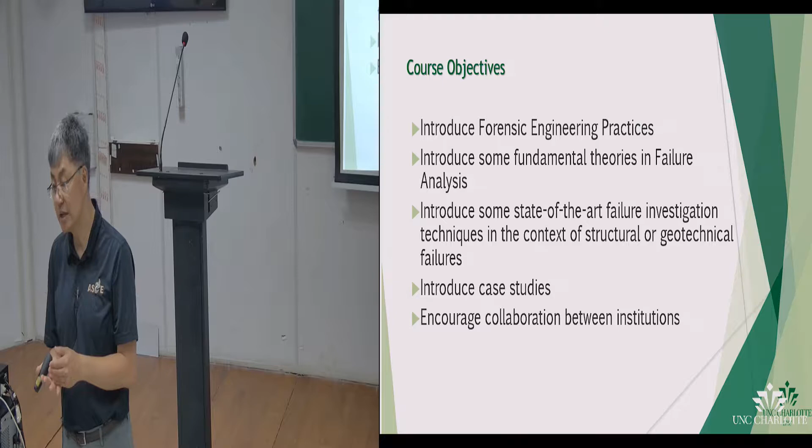Science is a very pessimistic topic. A lot of people learning science think, oh, I'm going to be a great scientist, I wanted to invent something. But by the time you want to invent something, you are no longer a scientist, you are an engineer. So Einstein once made a clear distinction between engineering and science.

Science is the investigation of things that exist. Engineering is the investigation of things that doesn't exist. In other words, when you design a building, the building doesn't exist yet. That's why engineering is very, very different and more challenging than science.

Science is very basic. Science is defined as the elimination of all possibilities. Does anybody think that by studying science I can improve human lives? You're wrong. You are trying to understand how life is, but you are not improving life by any measure. The moment you leap over into trying to improve life, you become an engineer, if that makes sense.

Forensic investigation is very, very core based on scientific investigation. You have to have the capability to look at a problem and start taking out all the unlikely causes. Whatever remains would be the most probable cause. Please pay attention to the way I use my language, because as a forensic expert, you have to stand in court.

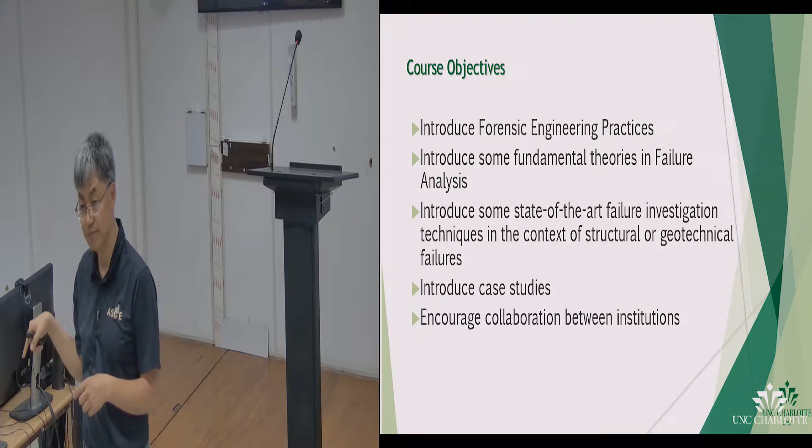They are building a dam, and they have to blast part of the mountain to create more space for the dam, and they are using the rock that was blasted to build the dam. As a result, the blasting caused a lot of homes to be damaged. So I'm defending for the homes, and the lawyers will ask me very critical questions.

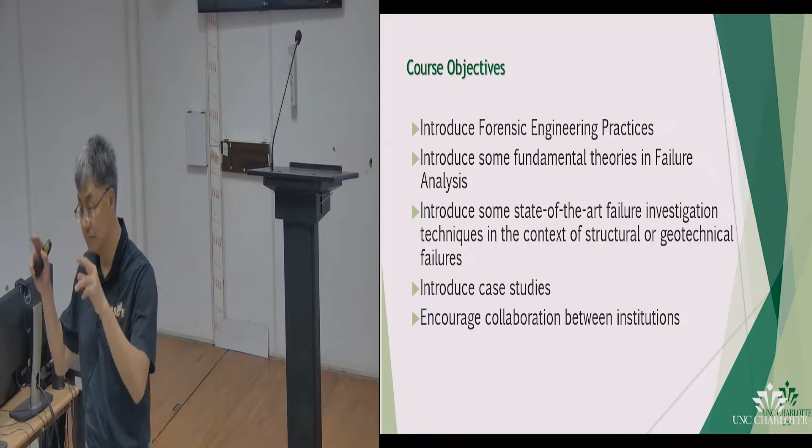I don't know how many of you have knowledge about blasting in mining. It is a very narrow area, and there's only one person, his name is Dowding, that has published a book and field reports on blasting effects on buildings.

I am a much younger gentleman than Dowding. He's probably in his 80s now, and he's no longer active, he's retired. So when I present my work, they will question me from his book, like, on which book did you find that Dowding actually says this is the reason for this kind of problem?

Did you prove that the house has cracked more than 0.3 millimeters? They ask those questions, and I have to tell them, well, no, I cannot prove that, because by the time the plaintiff comes to me - plaintiff are the people that sue, the other side is the defendant -

the case is already closed for 2 years. In other words, they stopped blasting for 2 years. So whatever crack I found on those homes, I have to use some other means to prove that it has a relation to the blasting, and I have to do it scientifically.

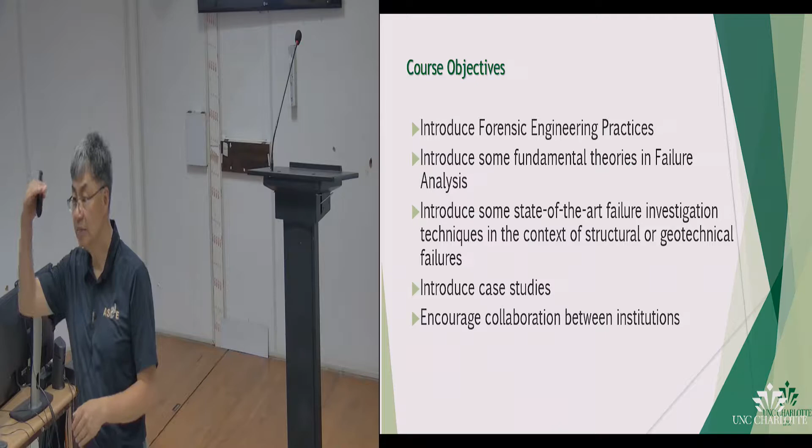I have to explain to them, yes, if you invite Dowding to defend against me, he has more seniority, I have less. But our scientific investigation approach should be the same, and our conclusions may not be the same, and then you have to present to them why. Throughout this two-week lecture, I will describe this case study and show you some of the methods that I use in practice. This gives you a sense of the challenge here.

We will also introduce, like I was pointing out, the LiDAR technique. I started doing LiDAR investigations since 2007. LiDAR was not very popular at that time - nobody used it. But now, at least in the U.S., LiDAR is used every day. When they have a new home built, people will use laser scan, which keeps an electronic document of your building.

So now, if you have a problem with your home, you can use LiDAR scan again and compare the before and after image of your home, and find out how much was the damage. Those are coming technologies that I believe within 10 years will be practiced in India, because Indians are very smart. Whatever is invented, within 10 years you catch up and do the same thing. So many of you, in your immediate career, will be seeing LiDAR scans.

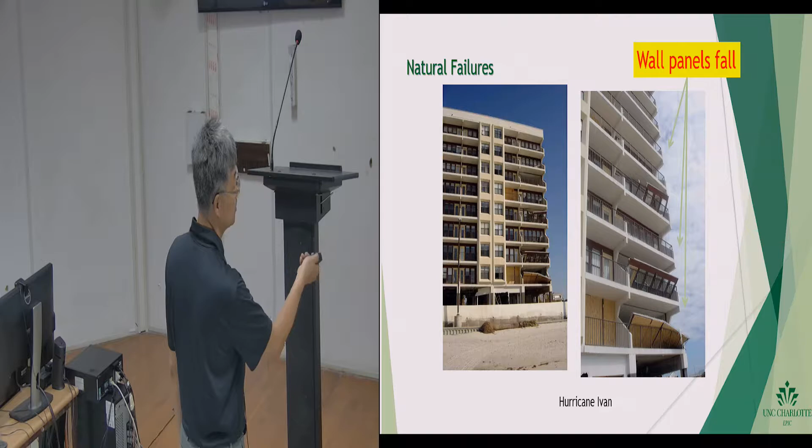So let's talk about failure. There are many aspects of failures—it can be a building that was designed poorly, or it can be something that had a natural disaster. This is Hurricane Ivan, and we did an investigation of this entire building, and you can see it has many kinds of problems. You can see all these wall panels fall off. Even this is the original panel—no, it's still the original, but they protected it.

In fact, this is a good time to mention that one of the lectures I'll be discussing is disasters that are beyond typical engineering design. Since this is a practice, I'll talk a little bit about the industry. Disaster industry is a $1 trillion business a year in the world, so forensic engineering is actually a profession that is blowing up. Many people are involved now because of failures, and many of these failures are going beyond engineering design. I'll describe a little bit about those based on my own expertise. In fact, some of our students here did the investigation together with me, so I'll talk about that as well.

You can see failures of these lintels, and the sand on the bottom. In the U.S., your client is most likely one of two kinds of people whenever you have this kind of issue. One is the plaintiff, usually the insurance company. Every house in the U.S. is insured in some way, so once your house has a problem, the first thing you do is call the insurance company, and they will send somebody like myself to do the investigation.

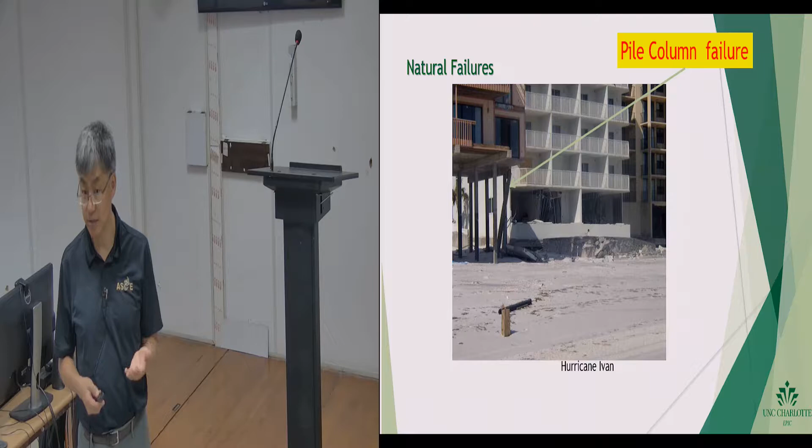As an investigator, it becomes very important for you to see details. You have to be able to quantify very, very narrowly. One of the arguments in this case is that there was a big car here, and the wave pushed the car and the car hits the column, and that's what caused the failure. Is that true? How can we prove that is the case? So those are the things that forensic engineers do.

Many times the argument will come here into this case is whether your building foundation liquefied. The reason is because in many countries, earthquake design and liquefaction of the soil are two separate issues. So this kind of incident becomes a very long battle for the engineers.

You have to prove a lot of things. You do a lot of drilling, you get the soils out, and then you have to do a lot of triaxial tests to prove whether the soil has either liquefied or not liquefied. You have to do a lot of dynamic analysis as well to prove that the shaking force was strong enough to cause the building to collapse. So a lot of those investigations have to be done.

After Trichy, I'm going to China, and I'll be taking 8 of my students from the U.S. to investigate the 2008 Sichuan earthquake in China. This is one of the significant earthquakes in 2008, and 80,000 people died, many of them buried alive. Our students are going there to collect the historical data from that time and then try to do some resilience assessment.

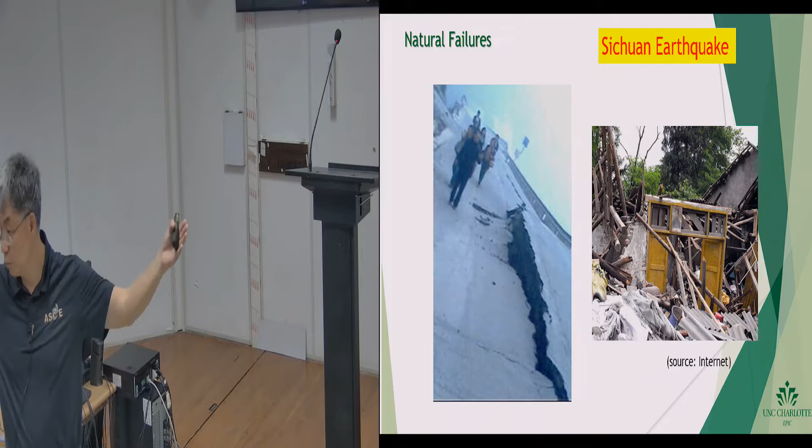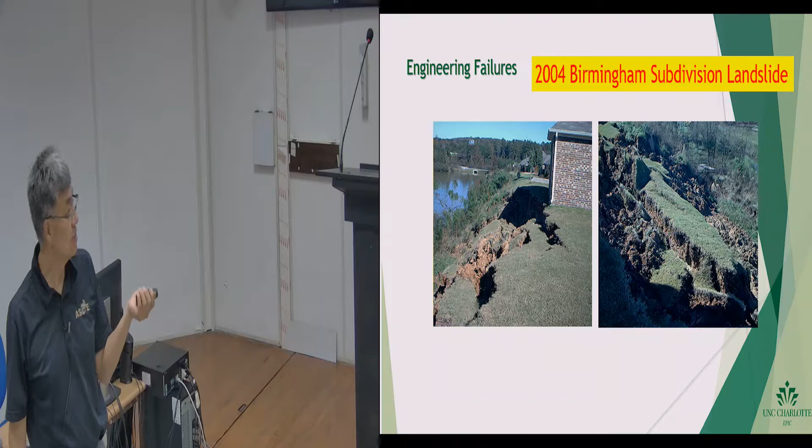This is one of the investigations I did early in my career, and it's a very unique case. At that time I lived in a city called Birmingham, Alabama, in the U.S. The temperature there is very much like here, it's the deep south of America, so the weather is very warm. What's happening is the city is growing, many people have moved in, new homes are being built, and it has a lot of hills.

Compared to Trichy, which is very flat, Birmingham has a lot of small hills, more like Madurai. The problem with Birmingham is when people start building a lot of homes.

It actually changed the groundwater level. When you have poor compaction of a home, suddenly the groundwater drops, then you start having soil collapse. We see a lot of those homes having slope failures or soil collapse compounded failures.

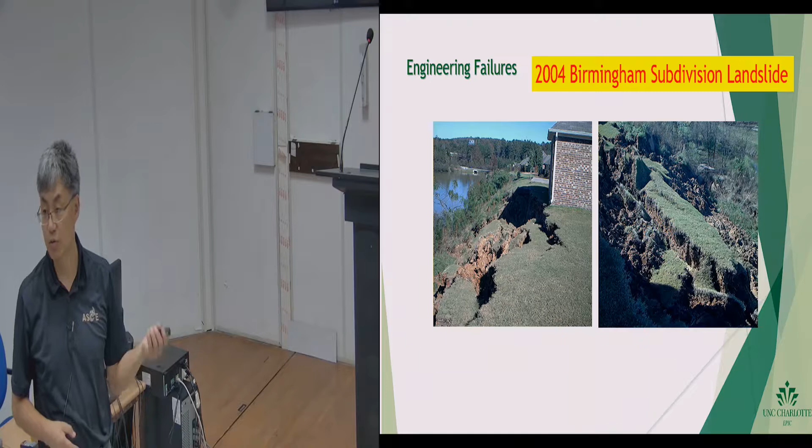We have to go do investigation. At that time we see multiple homes, and we start realizing the problem is much bigger than just poor compaction of the ground. The groundwater was actually fluctuated because of draining. People building new homes drained the groundwater and changed the water path, resulting in multiple home failures.

Some of my investigations relate to coal mining. In coal mine countries, you see a lot of homes collapse suddenly, even though the mines are closed. In Tamil Nadu I don't think we have too many coal mines - there's one between here and Chennai, but not a significant area. In the U.S. we have a lot of coal mines.

The only way you can prove this is subsidence - you may not be able to see it, but this piece of land suddenly dropped, so you have a very straight edge. That tells you this was not natural; it doesn't happen naturally.

So what we do is take the old mine maps - these maps were made in the 1960s, even before I was born, so there's no GPS data. We have to take this map and use Google Earth and similar tools to make sure this area is indeed on top of this home.

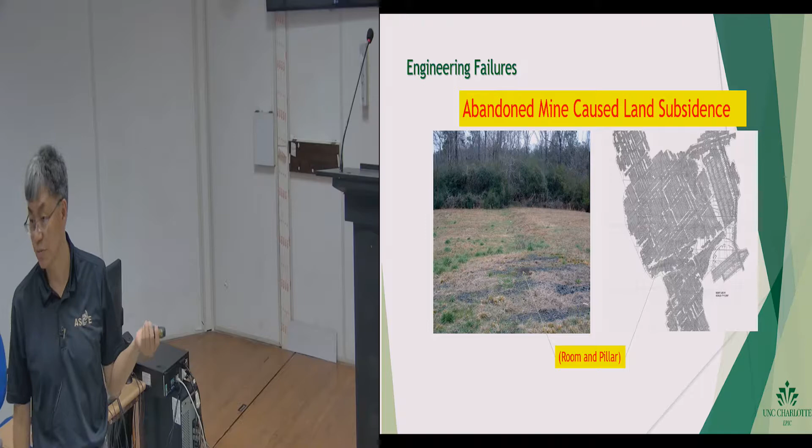We learn something in the forensic language: even though you don't have the means to physically prove this subsidence has something to do with the coal mine, because the mine is 1,000 feet, 300 meters deep, you can't prove it's directly related. But because this home was on top of the coal mine, based on the case law, you can judge the coal mining company responsible. This is what we call a class action lawsuit.

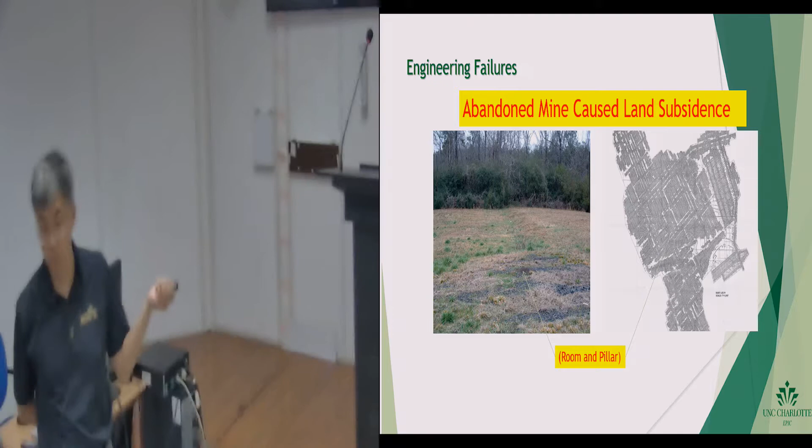Many of those cases have been investigated in the past, and those are big money. The mining company lawyers fight very fiercely against any lawsuit, because if you can prove one home is damaged by the coal mine, there are hundreds of homes. Suddenly they have to pay a million dollars - that becomes huge money.

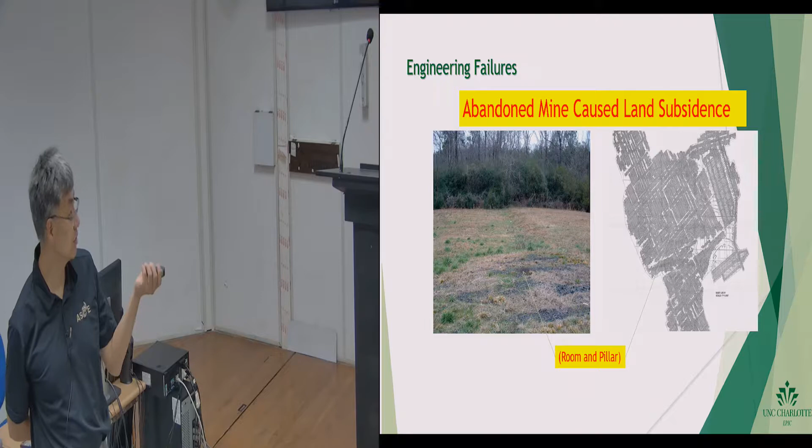This is a critical kind of case, and often your investigation finds the failure is more related to construction. This is a case where they were building a caisson - when they were digging and doing rock blasting, suddenly groundwater rushed in and everything collapsed. Now they stopped work and want to investigate who is at fault.

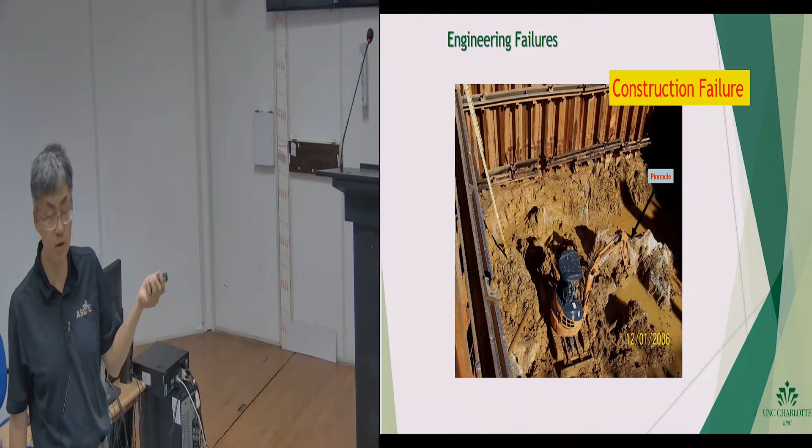You can see this bulldozer was literally stuck in the mud - they can't take it out anymore. So who is at fault? You're being invited to do investigation, so you have to go in there and look at the problem, and any technique you can use to prove one way or the other becomes useful. This is what forensics people do.

This is the same picture, and here you can see the sheet piles being driven into the rock. Notice that something came out from behind - the question is, what is this material? This specific lawsuit was actually the construction company against the blasting company.

Okay, so the construction company claimed the blast company did a very poor job in blasting this area, and as a result, some of the rocks became incompetent, became weak, and so when they drive, the rocks fall apart. But from this picture, you can see that this is something from behind the rock. Okay, so our conclusion is this is more geology than blasting.

Okay, so what happened in this part of the United States? We have a lot of what we call the pinnacles. In other words, in this area, if you take out all the soil, the rocks are like little mushrooms on the ground. Okay, and so when they do blasting, they blast out the rocks.

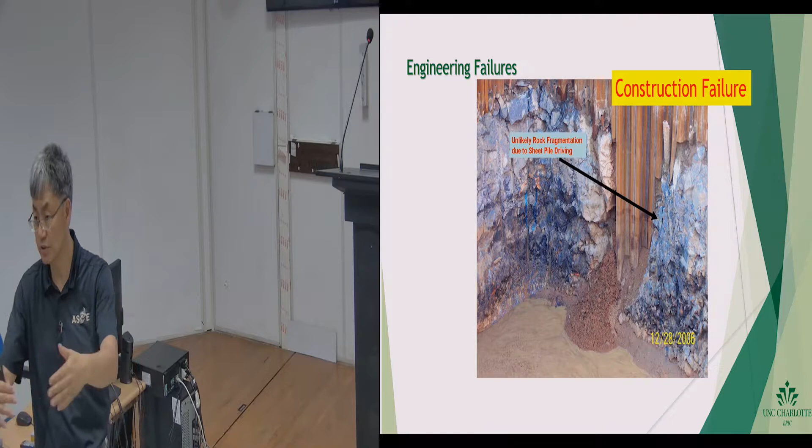Okay, and the groundwater in this case happens naturally because this project is right next to a river. So we know that they have very, very soft soil. But the piles are supposed to be able to protect the area from any groundwater seeping. Okay, so these are the cases.

And we will be talking about some famous cases like the 1981 Hyatt Regency walkway collapse. If you look at this picture, there is actually another walkway right here, similar to this one. This is one of those very famous case studies because in 1981, American law does not qualify engineers as liable for this kind of problem. But this fell because of design failure. In fact, when I present this case, we'll have more discussion on what exactly happened there.

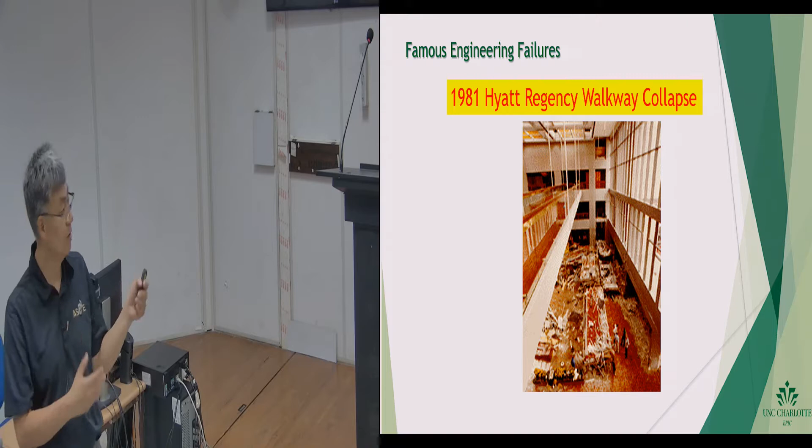And there's the 2007 I-35 bridge collapse. This bridge fell in what we call the perfect storm, and this bridge collapse becomes a strong litigation. Why? Because many people claim that the bridge was having major issues. But the fact is, when the bridge collapsed, they were actually repairing the bridge.

Okay, and so what happened in this case is the State Department of Transportation had already claimed that they did the inspection. They know the bridge is not safe. They had contracted a construction group going out there, and it was the perfect storm because this is a major highway bridge, and it happened at noon when people are going to lunch.

And because they blocked off half of the bridge, only half had traffic, and cars were parked completely on top of the bridge. And on this side of the bridge, they had many bags of concrete and steel beams all stored on top of the bridge. So you have the maximum loading on the bridge, static loading.

And then suddenly, since it's a truss bridge, some of the connections fell, and then the bridge collapsed. So that's what we call the perfect storm scenario.

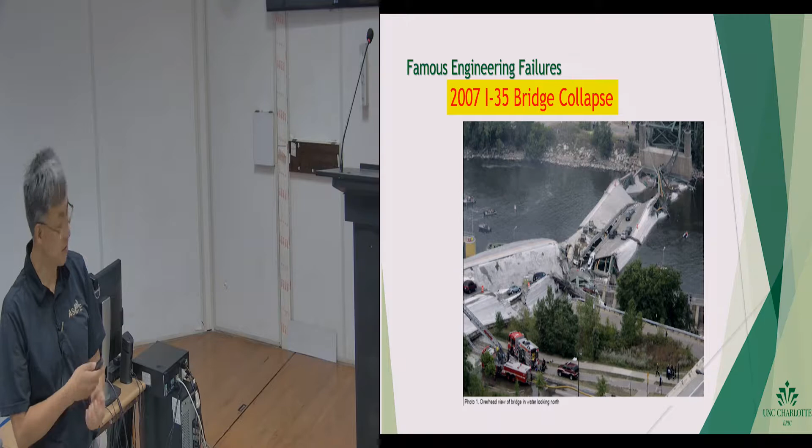And after that, for every major incident like those two, I will explain to you the implications to engineering practice. So after these two incidents, there's a lot of debate in the engineering profession about how we can do our job in a safer manner.

So forensic engineering is not just about doing a case, it's actually a practice, and we encourage it. In fact, this is one of the early missions that CN and I have when we start to collaborate: how can we promote forensic engineering practice in India? So that many people like you can put their minds together and we can enforce the practice, and hopefully we can be a much safer profession.

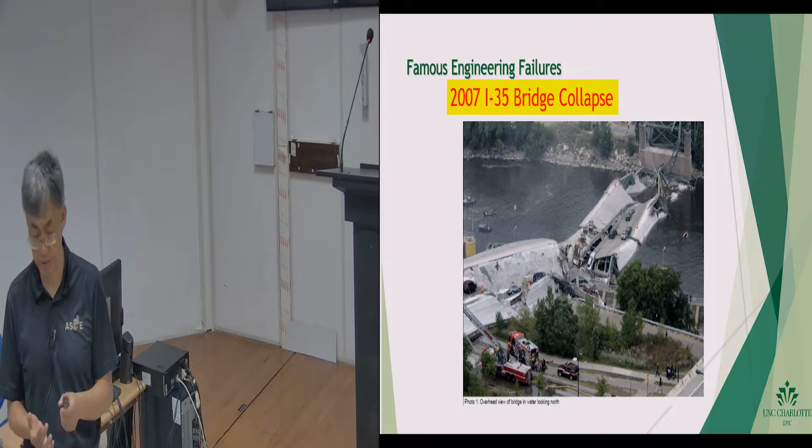And then there are some that are man-made. So this is the 2001 World Trade Center attack. The building fell. We don't know if it was actually the way that the terrorists designed for, but the buildings collapsed. In fact, this building collapse becomes very significant as far as technology for forensic investigation, because many people who saw what happened died. So there is no data for us to be able to investigate what actually happened.

Each of this building is a $1.5 billion lawsuit. So the insurance company for those two buildings and the owner are still fighting even today. And we hire some of the best forensic companies in the U.S. to develop some really advanced techniques.

So what they have done is they were able to take people's cell phone images, the video they take, and then use a computer algorithm to demonstrate what happened when the airplane hit the building. Even so, even with all this advanced technology, I still receive newsletters from a group of architects.

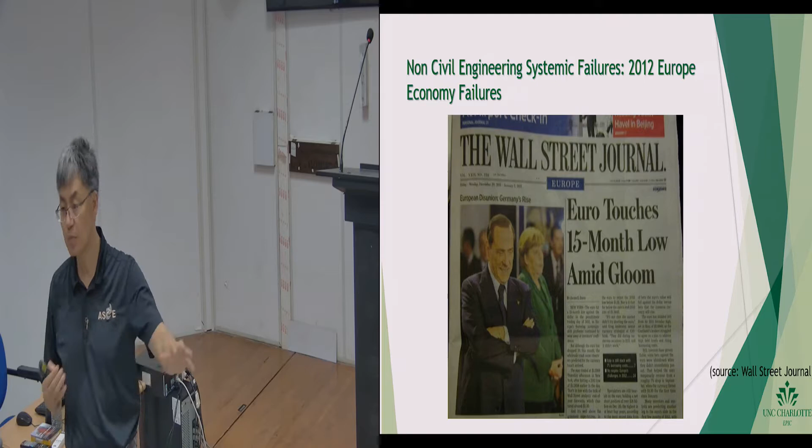And so you quickly realize that when you cross national boundaries like the EU organization, it becomes difficult to manage business. And that is why it should not be a surprise that today we have such an issue of Brexit. Even at that time, the British people had already voiced that they want to separate from the rest of the European countries. So you quickly realize that at the system level, failures go beyond your traditional civil engineering training.

And the analysis of failures from a failure analysis standpoint is very complicated. But most of the time, you go through a chain of reaction analysis, so you have to use a time-dependent process to look at how failures happen. If we are all educated in this kind of analysis, it will help us tremendously as civil engineers.

Because in every civil engineering project, there are windows of failures, or windows where you can see a failure. Because by the time you start talking about wanting a project - for example, build a bridge from here to Tanzhou - the project may start in 2000.

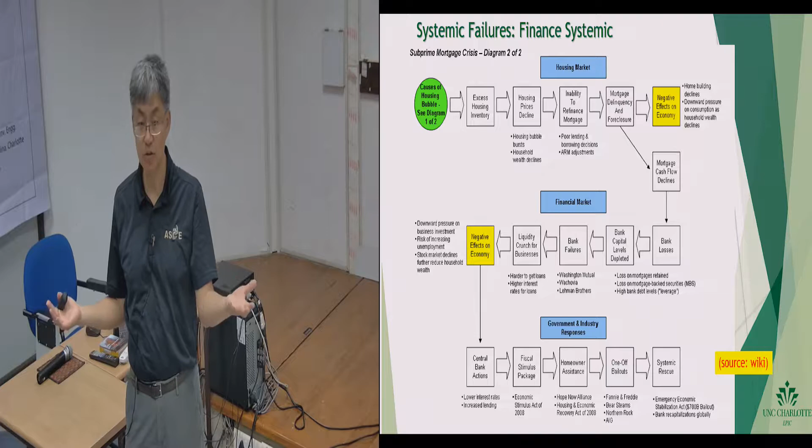By the time you do the preliminary design, the consulting company - the local government has to raise the money, right? So they go ask for money or whatever they do, and then once the money comes, they're probably already 1 or 2 years behind. 2 years behind means many of your investigations, the geotech, the initial design, may already be invalid.

And then once the government has the money, they ask you to redo the design. Many things change - the local people start fighting, politics get involved - it will be another 2 years before you finally start designing and building your bridge. So within that 6-year span, many things could have happened wrong, or could cause something to go wrong later.

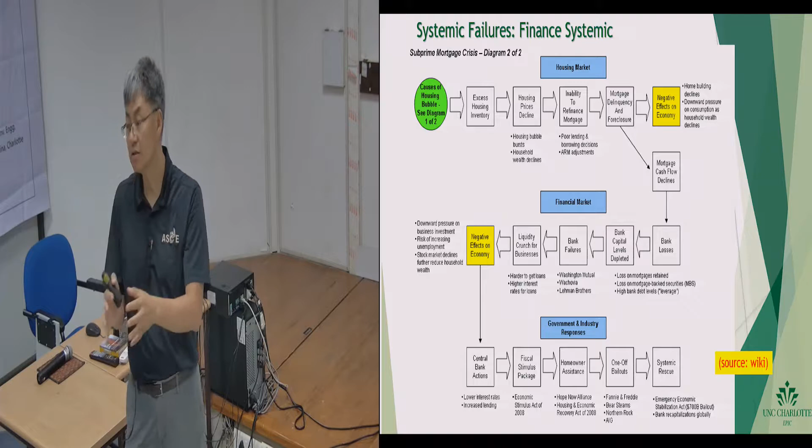So we'll be looking at some failure cases. And there is another kind of system failure, and that is from our own engineering problem.

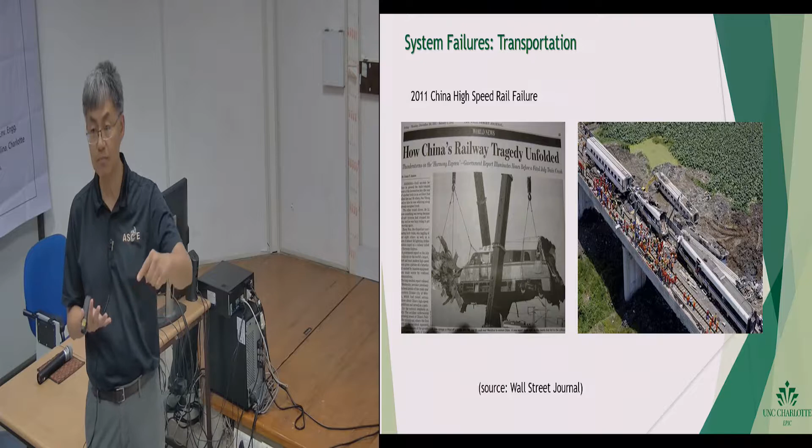This is 2011, one of the high-speed trains in China that failed. This is the route from Shanghai to Beijing, the two largest cities in China. At that time, from Shanghai to Beijing by train, it takes 7 hours, running at 300 kilometers per hour. So they wanted to reduce the time, so they designed the train to run at 380 kilometers per hour - that would cut down the time to 4 hours. Well, the first time the train flew at that speed, it had a major accident, and many people died.

So the Chinese government is not the smartest government, no matter how much they think about themselves. So what did they do? They limit it - from now on, no train will go beyond 350.

Instead of solving what went wrong with this problem, they used government law to limit the high-speed train. The reason why they don't go into the technology is because this is not Chinese technology—every high-speed train built in China is German technology. The Germans built the first line for the Chinese, and after that the Chinese just replicated it on their own, so some of the embedded technologies they don't understand, even today. Instead of admitting they copied other people's technology, they just hide the problem.

So the transportation minister was put in jail—I think he was shot. They claimed he had some kind of corruption, and then he was killed. But then they just limited the highest speed the train can ever achieve, found somebody to blame, and forgot about the technology. That is not the way engineering should be practiced.

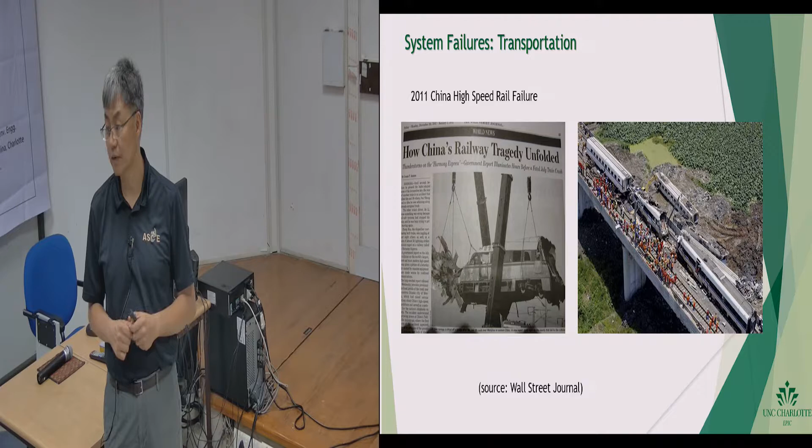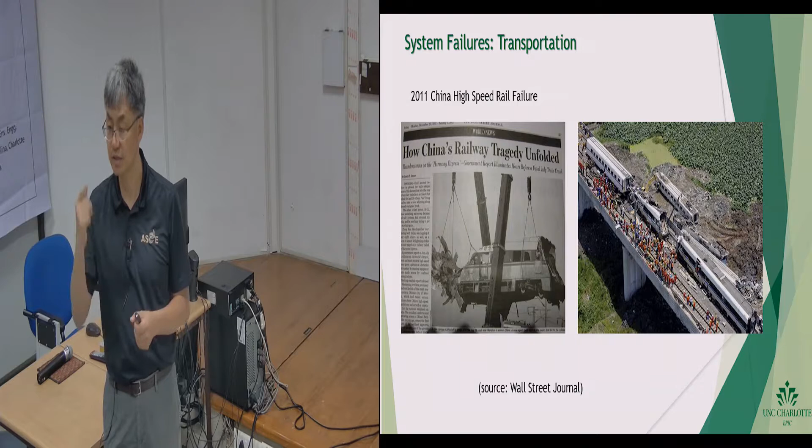We need to dig to the roots of the problem and understand how it is designed—that should be the way of engineering. So even though sometimes politics is involved, we as engineers, I hope, have the guts to at least stand up and say, I want to learn everything that is inside.

What I just described is nothing new. We have a famous professor in my state—he's not from my institution, his name is Henry Petroski. Please write his name down. He wrote several books about engineering failures; he's famous for the study of engineering failures.

He famously claimed that every 30 years there will be one famous bridge collapse. He's pointing the finger at all of us, in the sense that there is a common, very pervasive habit—it's not just the Chinese. Every one of us has the habit of copying somebody else's design, and if you don't fully understand the design, you just copy.

Eventually it's like taking an image and recopying it on the computer—the resolution disappears, it becomes a very poor quality image. Why? Because every time you copy somebody else's work, if it's not the original, you lose a lot of the fundamental theories. As a result, one of us will screw up and build a bridge that will collapse. In his book he mentions many case studies.

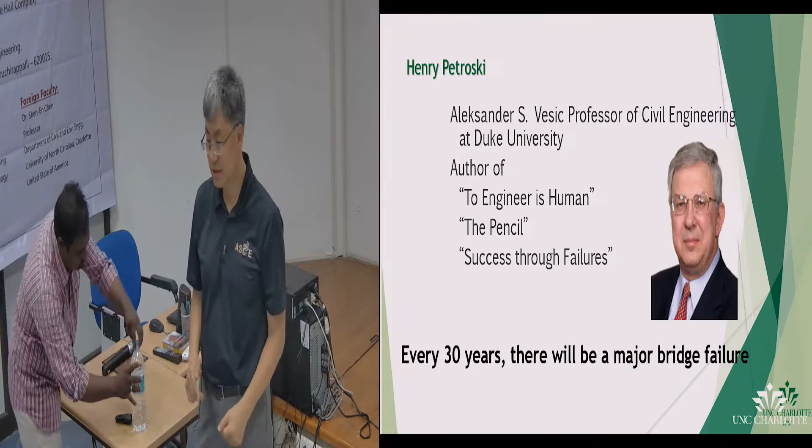One of our projects for our BTech students, the last year's BTech students every year, is to design how we can mine from meteorites, asteroids. The world will be very different as we evolve, and especially some of you BTech, when you graduate, you'll be doing something very different.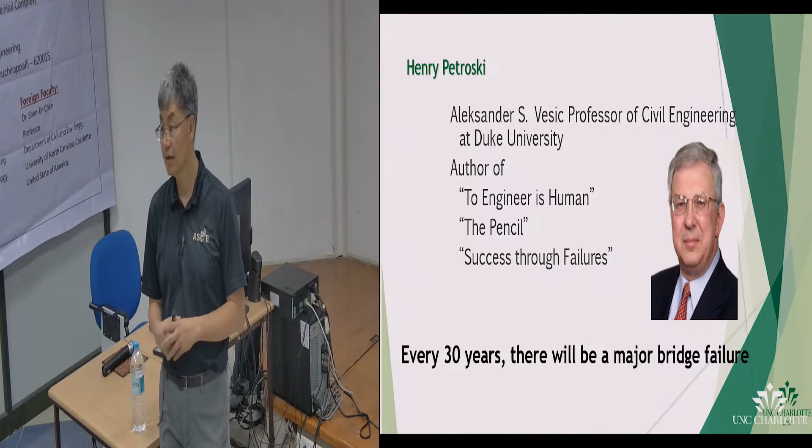Automation is coming, so there is a big call for robotized construction management, construction process. 3D printing of concrete structures is coming. Steel structures has already been done. So there are so many things that are changing the fundamental practice of our profession.

So like what Petroski was saying, because of all these new technologies, failure will happen. And so learn from failures—it's the most important lesson for all engineers. And that's why we are here to promote forensic engineering and failure analysis.

I mentioned some of the tools. These are just a few of those. The essential idea, and all of this, there is software behind that supports all these theories.

So the window of opportunity model is a time series analysis method. When you look at the history of a building's lifetime, there are so many possible opportunities that can essentially create a future failure, from the design to the construction to the operation of a structure.

So if you can create such an architecture of the history of a structure or a design, you can go through a project and identify where that failure may have already been embedded in your design or project, causing a future failure. And those are very important because then you know how to correct the problem properly—those are critical issues.

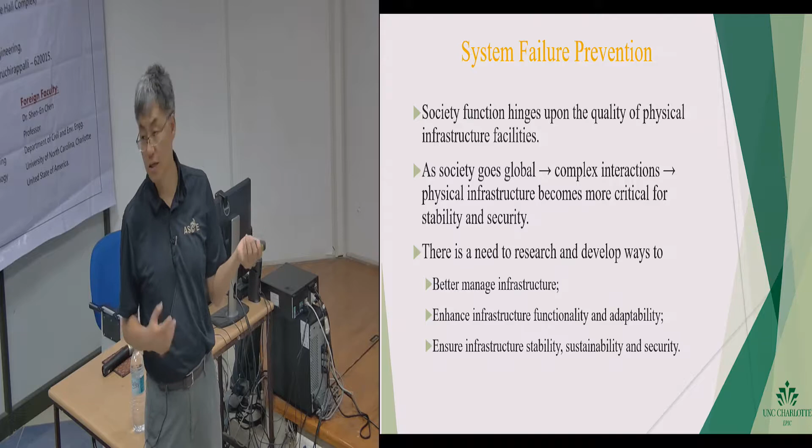And as I mentioned, system failure prevention is very important at the system level because society is becoming much more complicated today, and even the interaction between people becomes more complicated. So we need to be able to manage and enhance its performance, and stability, sustainability, and security are all critical issues that we are dealing with today.

And these are some of the changes: technology advancement is rapid, but institutional change is a lot slower. So you can actually take every one of those high-level components and recognize its implementation.

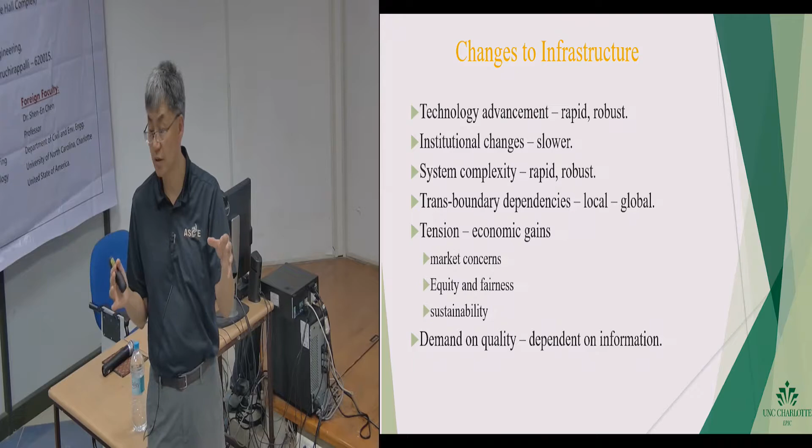Throughout my several lectures, I will show you from different perspectives how forensics can actually benefit some of those other disciplines of study.

But the important thing is to recognize that a project, every time we talk about a project, is no longer just a simple owner-client relationship. It goes beyond—it goes to government, it goes to insurance, it goes to the people who actually live in a home and so forth.

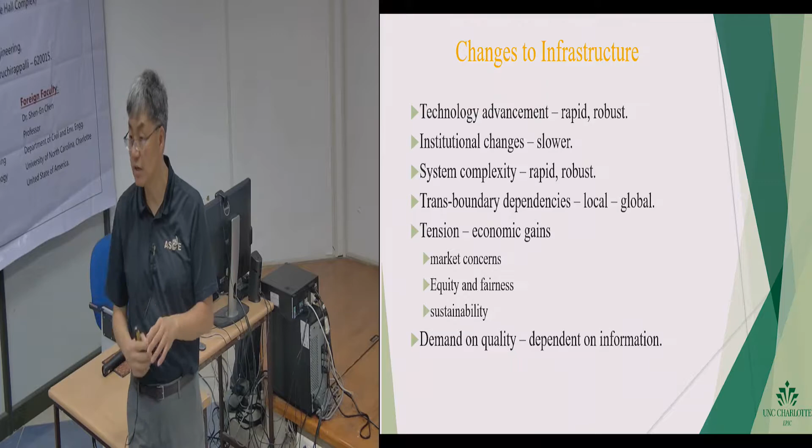This is not something new, right? Everybody should have an understanding. And also recognize the players in this—there are many players that are involved, and actually this is a very important part.

So one of the lectures I will be dedicating to is the industry. When I mention that forensics today is a $1 trillion industry, the people who come up with the money to fit into this industry are not just owners. We have found that there are many civil engineers—maybe one of you one day will be—actually working for NGOs, groups that are non-government yet dedicated to humanity efforts. And those are the people that actually come up with a lot of money.

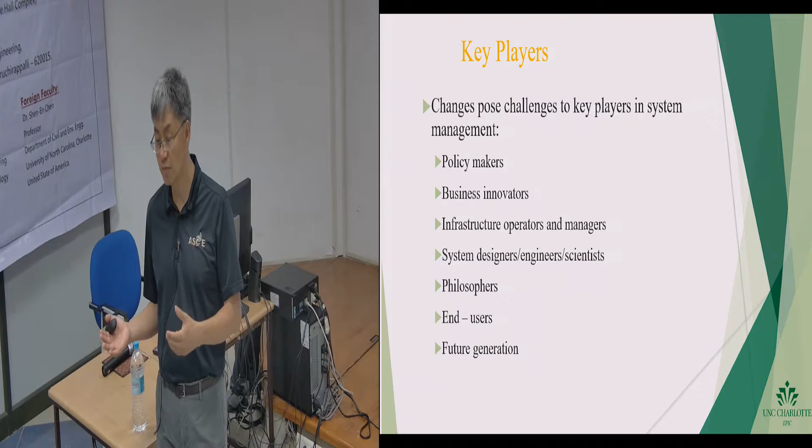The city I live in is called Charlotte, and one of the groups within my city is the largest NGO group that supports disaster relief. They are called Samaritan's Purse—I don't know if you've heard of Samaritan's Purse. They are the largest group of people who donate money and material. They actually own big cargo airplanes that, if there's a disaster in Haiti or somewhere in the world, will fly materials to those countries.

I don't know if you know, but South Korea is one of those developing countries trying very hard to make themselves known. In 2014, before I came to Trichy for 6 months, I was in the Philippines—at that time they had a hurricane. After the hurricane, South Korea sent a lot of money and people to the Philippines to help. So when we landed in the city, everywhere there were banners saying 'Korea help us, Korea help us,' because South Korea is trying very hard to make themselves known, since they are on the verge of becoming a developed country. So they have to push, just like China today.

China is pushing very hard to make people internationally known for their projects.

You may ask, why? Well, because of credit. If you are a developed country, you get less money from the World Bank and the United Nations, but you actually become a country that contributes money. From a financial perspective, your country gets more credit, and more credit means your currency becomes stronger, among many other reasons. That's why China and South Korea are in this position, and Japan used to be as well, since they're already a developed country. But pushing yourself from developing to developed status requires a lot of activities, so India may be next in line to push toward that goal. That's why a lot of NGOs are getting money from those countries.

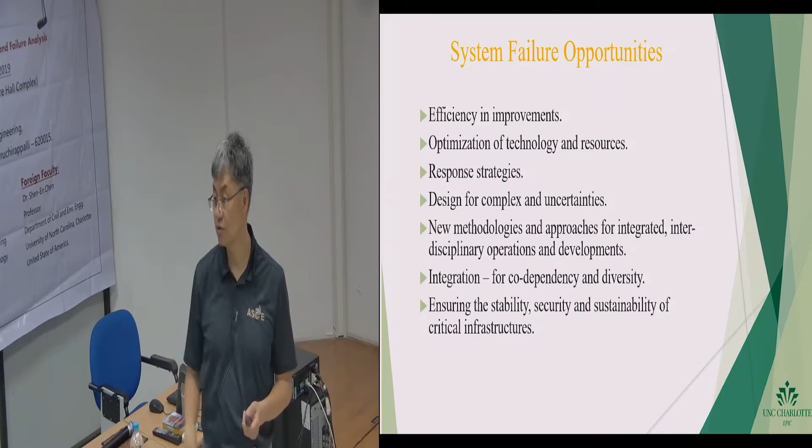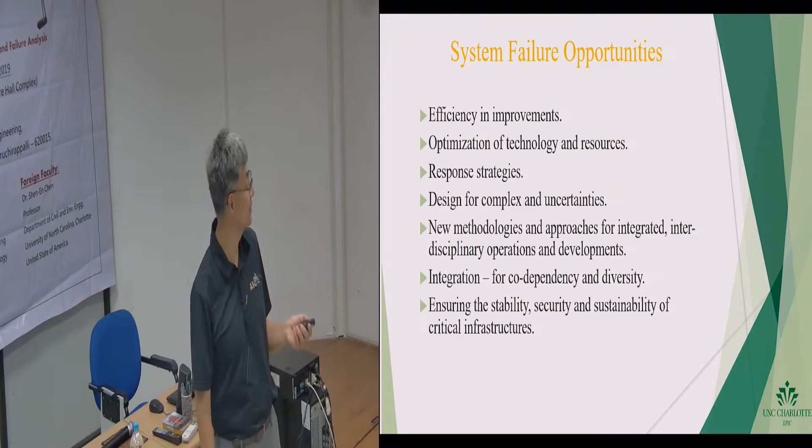We have a new student that's arrived. Hi, sorry I'm late. Oh, no problem, welcome. So, your good name? My name? I'm Chen. Where's my name? Okay, I'm over there. Where are you from? I'm from Mumbai. Oh, okay, Sardar Patel College of Engineering. Welcome, you can sit here.

The classification of system failures is another thing that tomorrow, when we go through Dr. Shen's lecture notes, we will realize failures are of many different types. As you know, structural failure and regulation failure are all related. If you design not based on design codes, that's a regulatory failure.

And then technology failure, if you use the wrong construction techniques and so forth - believe me, this can be very tricky, because we are constantly pushing for more robotics, more automation. When you have a new machine, there's less control for the people, and as a result, when you have failures, you have failures. So how do we make sure that doesn't play into your entire project, and how can you minimize failures becomes a very important aspect.

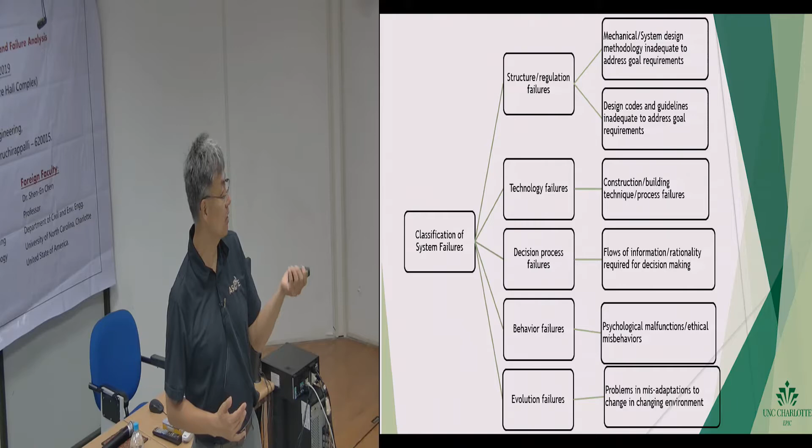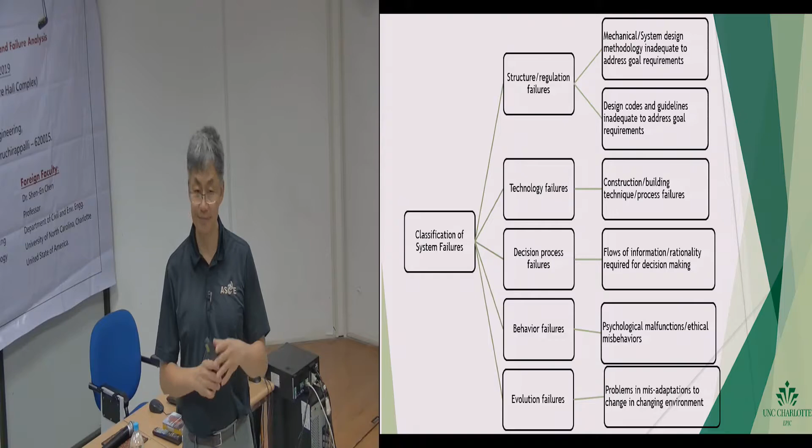And decision process failure - the flow of information. So in the US now we're pushing very hard on using more BIM, building information modeling software. So AutoCAD or the Bentley software are very popular now, and I'm pretty sure here you are also pushing students to learn Bentley.

And the flow of data is a big issue. I personally have difficulty managing my data. I've been coming to Trichy more than 10 times now - this is my 11th trip - and even preparing this lecture, I'm trying to find pictures from way back. I go through so many hard drives and couldn't find my pictures, spent hours and hours. So management of data is a big issue, right?

But how can we be more successful when we have completely relied on information technology? If the electricity is gone in this place, I'm sure nobody can do any work - everybody just goes home, right? My kids panic when the power is down and the Wi-Fi is gone because they cannot play on their iPad, so they'll be yelling and crying - technology is gone. So those are really big issues that we have to start talking about.

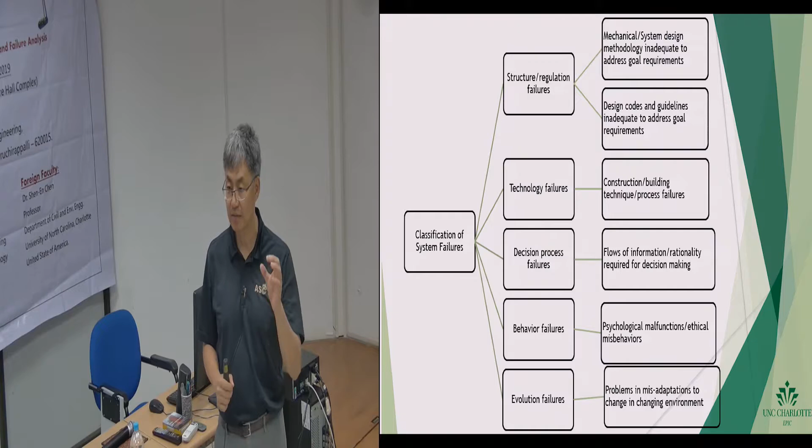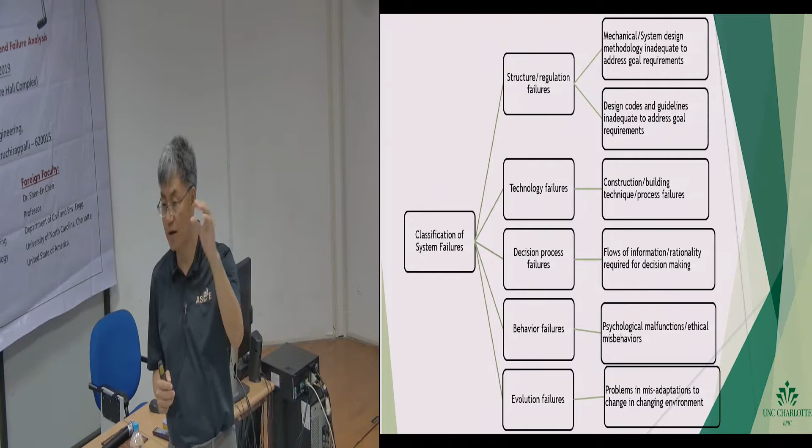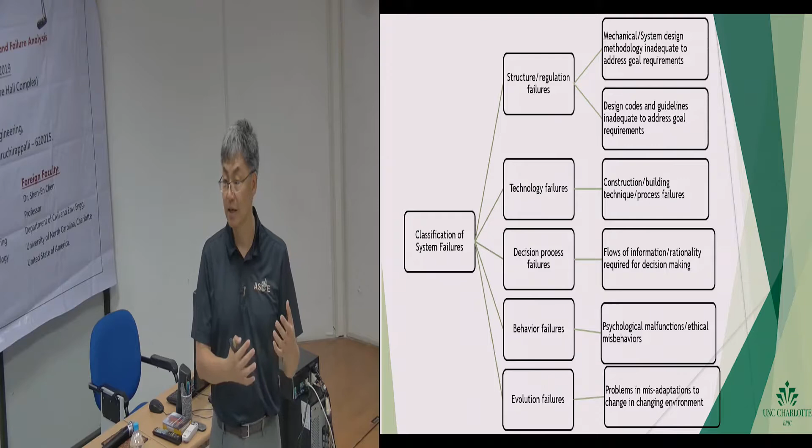And then behavior - fundamentally, there's a school in system and safety engineering that studies how behaviors contribute to engineering failures. We are all humans - that is one of the premises in Petroski's book - that we are humans, so we are bound to have failures. So how can we improve engineers so that we can be less failure prone is a very big question.

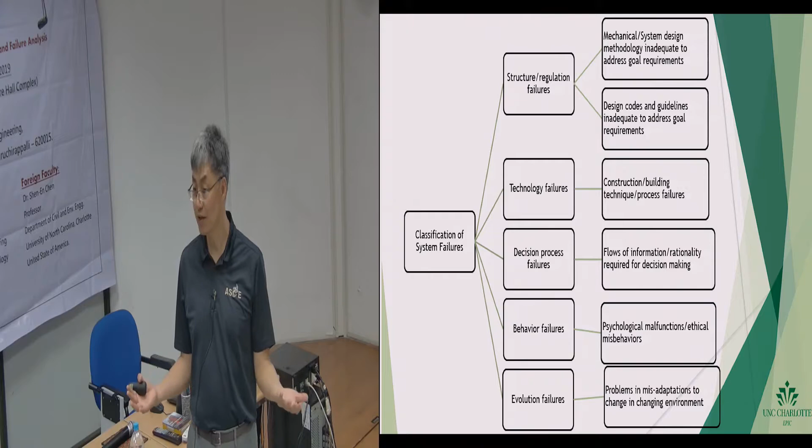Is automation the way to go - replace all of us? Is that the way we should design engineering for the future? Some people think so. Then what about the rest of us? How can we protect ourselves or manage ourselves so that in a robotic age we can work with robots, who make most of the decisions? Those are critical questions.

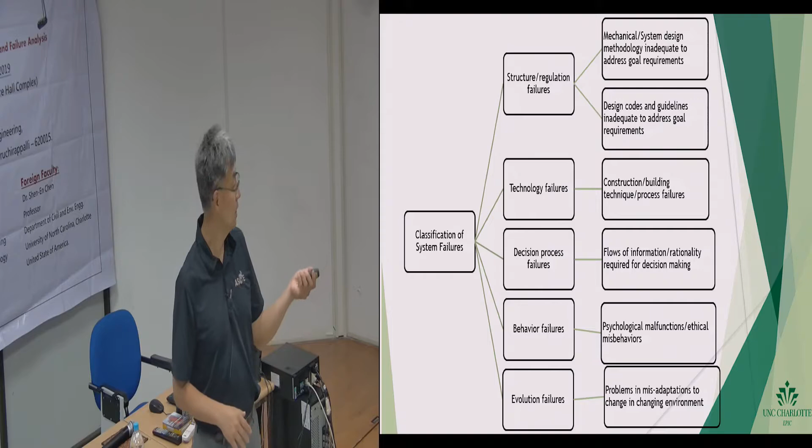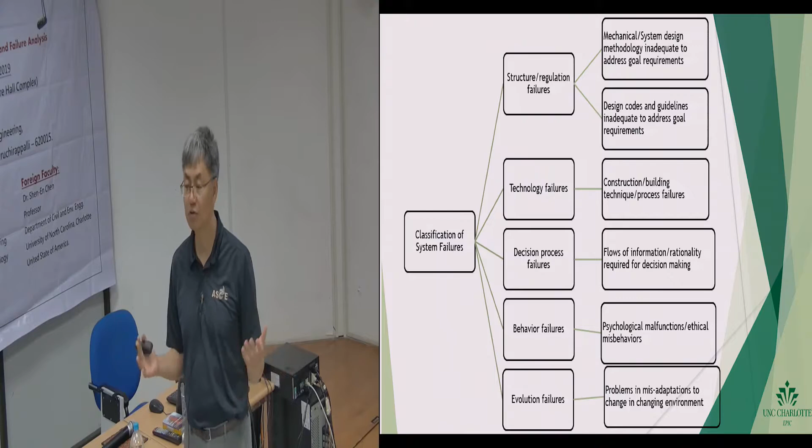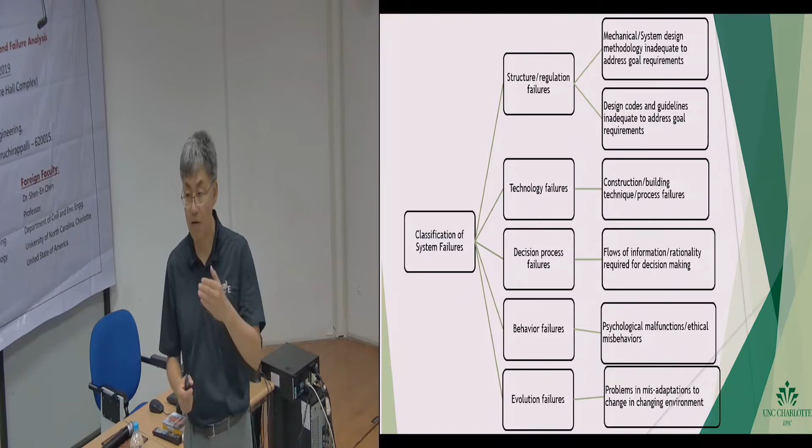And finally, evolution failures - that is what Petroski is saying. Because we like to copy one another's work, which, by the way, is not necessarily wrong, but you have to understand how design is done. Every time a new type of bridge comes up, there are people who are so rich, they want you to design one of those. So how can you find the right information to learn to do the design right becomes extremely important, and those kind of evolution failures need to be avoided if we are smart.

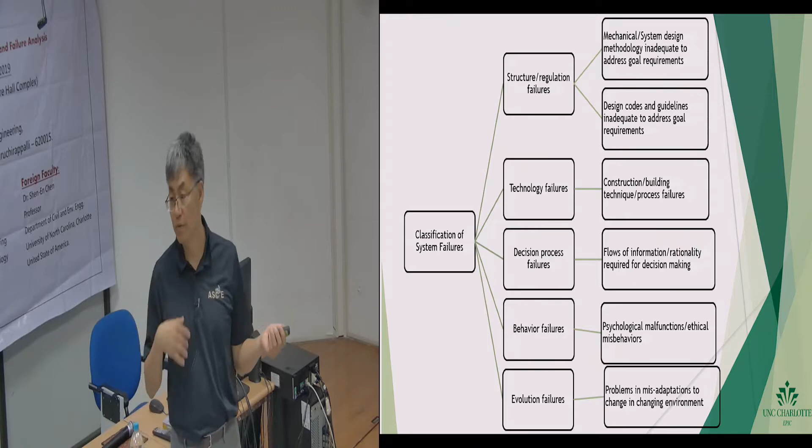And so those are critical questions that we may not be able to address through this class, but you can guarantee somebody is studying this kind of behavior, or this kind of problems. So, the role of failure analysis in a nutshell in forensics - oh, there are more, I don't know how to...

Okay, well, something missing there. Okay.

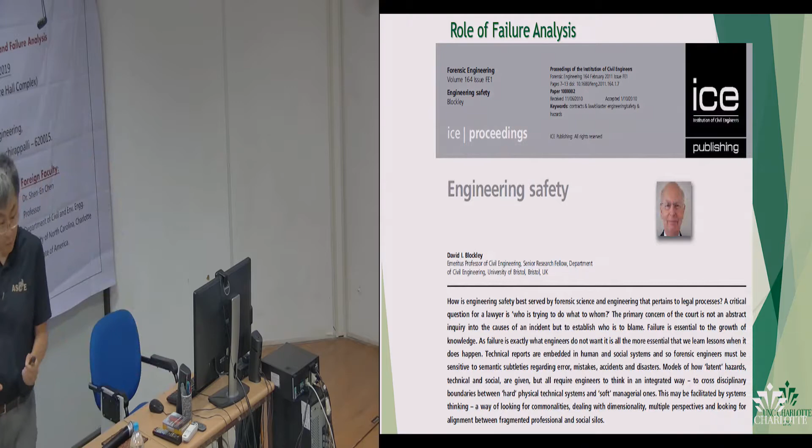Oh, sorry. So, as I mentioned, in the Institution of Civil Engineers, there is a proceeding called Forensic Engineering and Engineering Safety. So those are the resources that you can go to, to look up articles or publish your own work.

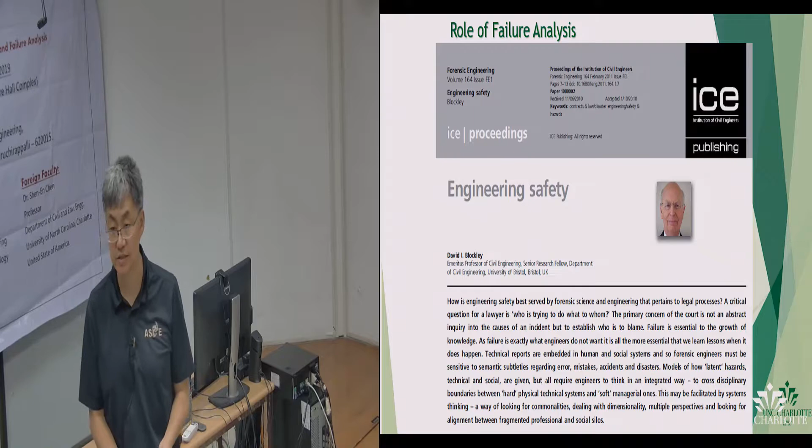So this is a paper by Blockley, and here it says engineering safety is best served by forensic science and engineering. So this is one of the reasons why we should study forensic engineering. And again, forensic science and forensic engineering are very, very similar, except we serve different disciplines of engineering.

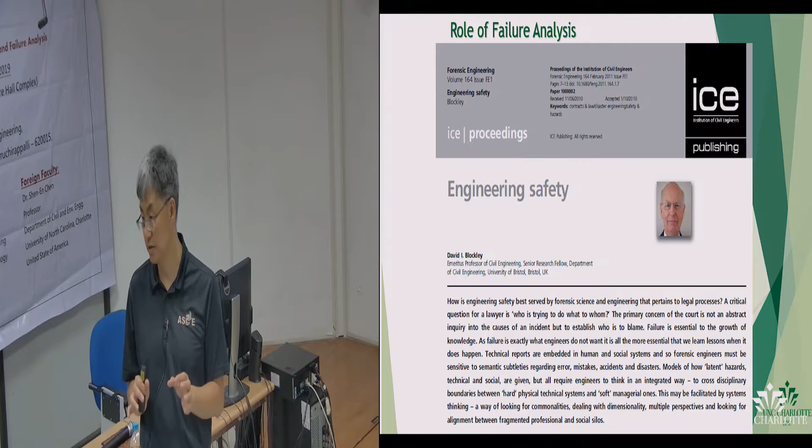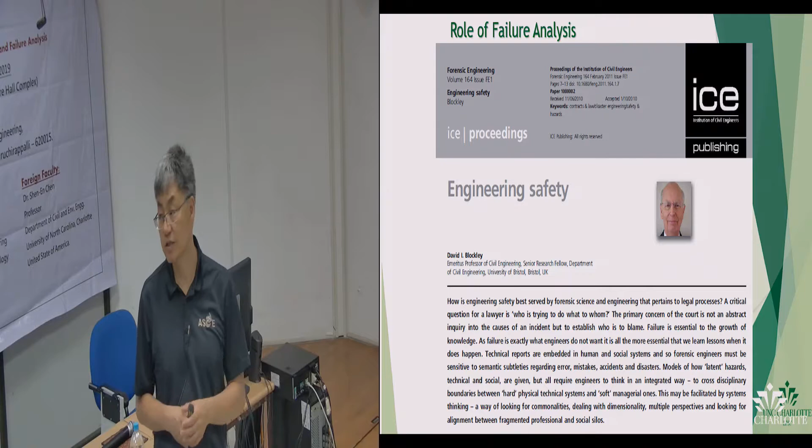So for civils and mechanicals, we call it forensic engineering. But for computer science or biomedical areas, they prefer to be called forensic science people. Okay, I believe this is okay.

Just a few words about forensic engineering in engineering curriculum. Now it's 2019, and in the US we still do not have a BTech in forensic engineering. The reason is because in the US - and I'm pretty sure India is going towards that too - everything that we develop is dictated by ABET. So you have to satisfy ABET requirements when you have a certain discipline being established.

Under ABET you have to satisfy all the humanistic, engineering, design, mathematics, the STEM requirements. So how can we ensure that the forensic engineering BTech certificate has all the requirements becomes a big problem, and people in the community are still debating about this.

There are several courses being suggested. In the US today we are still very limited in schools that actually teach forensic engineering, whether it's one course, 3 credit hours for a senior capstone design project, or 3 hours of a studio type class, or 3 hours of lectures plus homework. There are only a few schools that offer it.

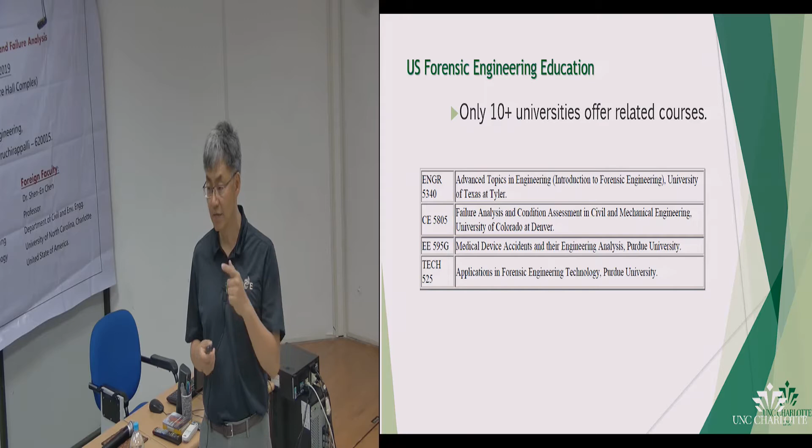I think Princeton or Columbia are the only two schools that offer a certificate at the BTech level. Our school has a forensic certificate as a concentration. I think you do concentration as well, right? Structural engineer, graduate BTech, geotech, you have to take a few more classes. At my school, you have to take 4 classes focused on forensics to get a concentration in forensic engineering, and many of our students do so.

These are some of the classes. There needs to be an advanced topic in engineering - that's the University of Texas at Tyler as an example. Then Denver, Colorado has a failure analysis and condition assessment class in civil engineering. And then medical device and engineering analysis at Purdue University. Purdue also has application in forensic engineering technology. So those are examples of classes offered at the engineering level.

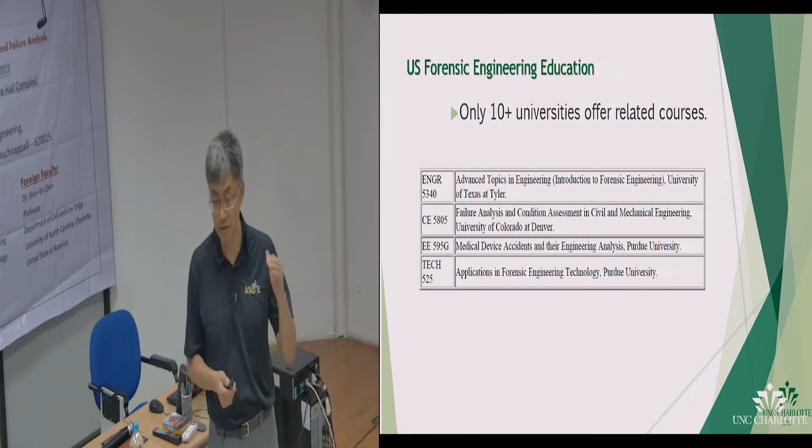Other than the technical council I described under the umbrella of the American Society of Civil Engineers, the U.S. National Academy of Forensic Engineering is another branch of forensic science, but they work closely with lawyers. They mandate a certification to practice in forensic science, and they publish books on how to be a forensic engineer consultant. They recognize 4 reasons why forensic curriculum has not been offered in the U.S.

So the first one is that it's not a standard discipline. In other words, the traditional discipline is structural engineer, geotechnical engineer, environmental engineer, and transportation engineer. So any school that wants to go beyond this and create your own discipline has to be able to find an equal or collateral discipline so that you can make a comparison.

Over the past we have been looking towards construction management or construction engineering as our parallel. There are some schools that offer construction engineering as a BTech degree, however those are not common, so you have to look beyond that level.

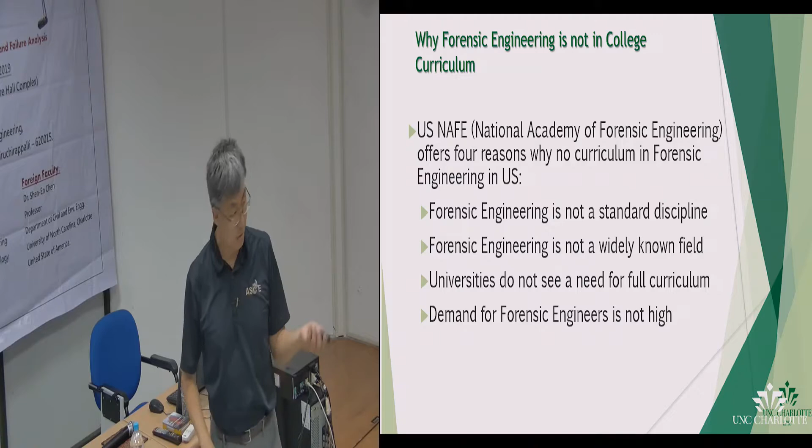The last point is, definitely I do not agree - the demand for forensic engineering is not high. I definitely disagree, because now forensic engineering is a $1 trillion project worldwide, not just in America. I will talk about some really high-level, big disasters that require many of us to practice. All of these things, we have published a paper disputing those points.

Okay, and NAFE, the National Academy, also suggests those for the MTech level - these are the classes that need to be involved: liability, product liability, introduction to forensic engineering projects, advanced forensic engineering techniques, and computer application in forensic engineering.

Computer application in forensic engineering is one area that's especially interesting. I don't know how many of you remember the Chennai Moulivakkam case - the faith project where one of the buildings collapsed. I was part of that investigation, not on the government side, and the Germans actually did a multi-physics particle mechanics model, which I will share.

It is a new tool. In the U.S. it's not something we accept at this point for forensic cases, because it's a simulation, and in a simulation you have to have parameters that you have to assume. So there are many things that people will argue.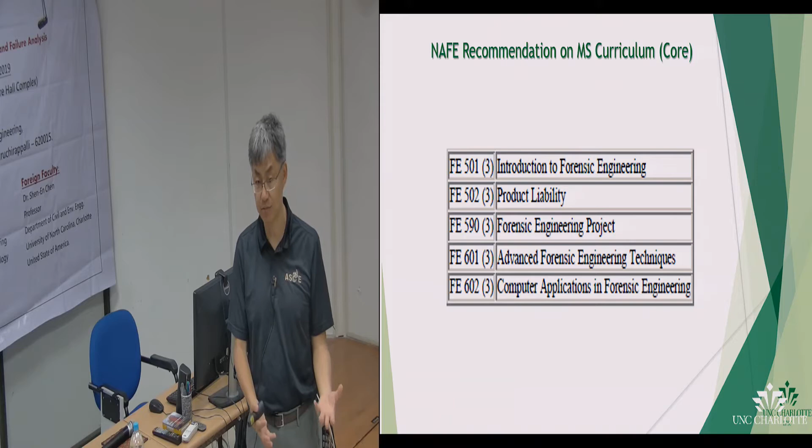This kind of new tools, like finite elements and discrete elements, are slowly becoming very popular. People argue, if we use it for design, why shouldn't we use it for investigation? In the U.S. courts, this is one of the hot topics being debated. But we don't have a solution yet, and I will discuss a little bit about those.

And then finally, they highly recommend an engineering ethics class and mathematics, especially statistics. As I mentioned, we should study every investigation in a systematic manner.

In some cases you can actually build replicates and then study how it fell. Those highly require statistics, but I also argue this is different from scientific investigation, in that you can only have limited data.

The reason is because they don't pay us well enough as forensic engineers. In other words, if I were to do a thorough systematic analysis of a certain case, I'll have to do many experiments and eliminate all the causes. I will describe one or two such cases in my presentation.

But in chemical analysis, all of us have studied chemistry, right? In chemical analysis, if you want to prove something has carbonate, what do you do? You have to have many solutions, right? And then combine them, and suddenly the litmus paper turns blue - then you know you have carbonate. That proves you have some solution, right?

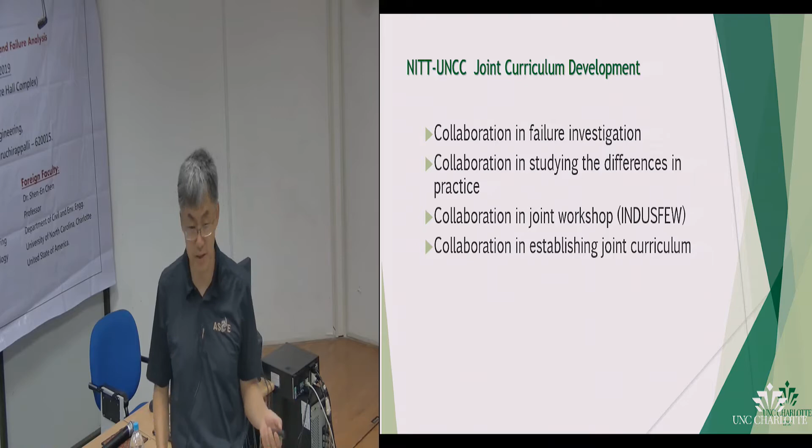I think my time is almost up. And so NITT and UNCC have collaborated, as I mentioned, since 2007. I don't remember how many times I have been teaching this, but in 2010 we had a very special year because we actually got government funding both from India and the US.

I want to tell you a little bit of history. Forensic engineering in India was nothing new. Many engineers actually did forensic work, but they didn't know it was called forensic until a gentleman called Dr. R.N. Raika, an Indian national who lived in Mumbai and was the ACI chapter president at that time. He and Ken Carper were close friends, and Carper was the inaugural editor for the Journal of Performance of Constructed Facility, ASCE's largest journal for forensic publication.

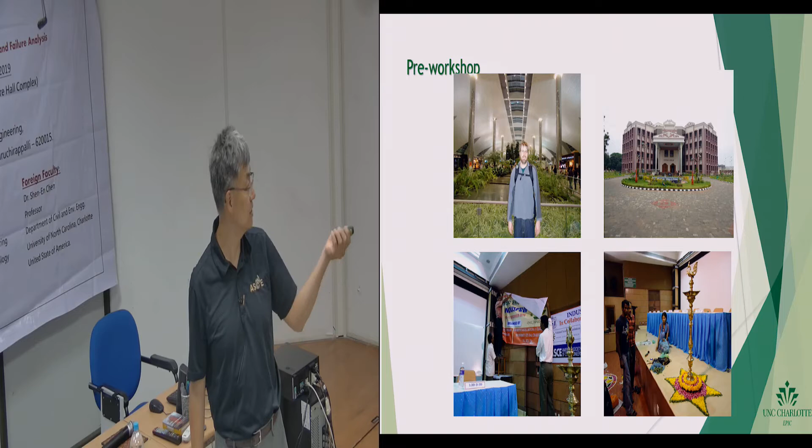We came here when the library was just built, and this was the setup for the conference. This is my student Ryan, who presented some of his work here. And this is my mentor, Dr. Janardanam, at my institute, who came personally to make sure CN and I got the job right.

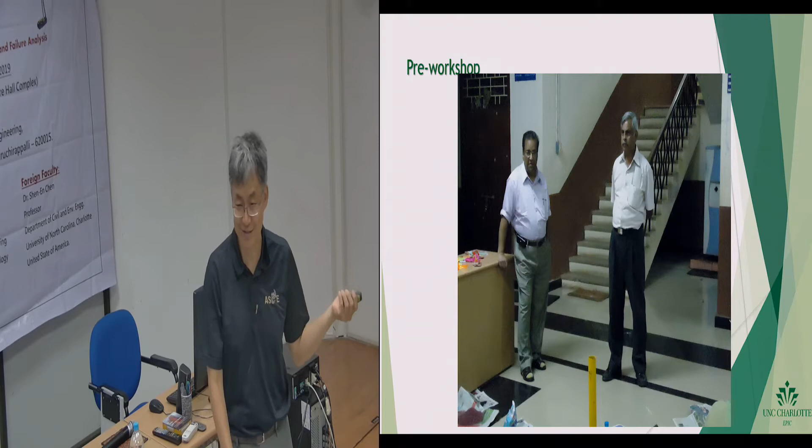All the students at the civil engineering department were involved, many even before you guys. They did this puja every day with a new design, which I found fascinating - a new design every day. I really enjoyed seeing this.

Over 200 audience members sat there. This is Dr. Delat presenting some of the work, and we had people attending - he was a student then, now he's a professor at my institute. Many of them presented.

We also had many Indian experts - this is Prasad from Madras, this young girl also from IIT, and these are engineers from SCRC. So we had many Indian experts; it's not like India doesn't know forensic work. We had about 200 people, many discussing and talking.

This is an American, but she dressed in Indian dress. There were many awards and appreciation ceremonies. NITT really did an excellent job showing the hospitality of India, and everybody is still talking about that trip even today.

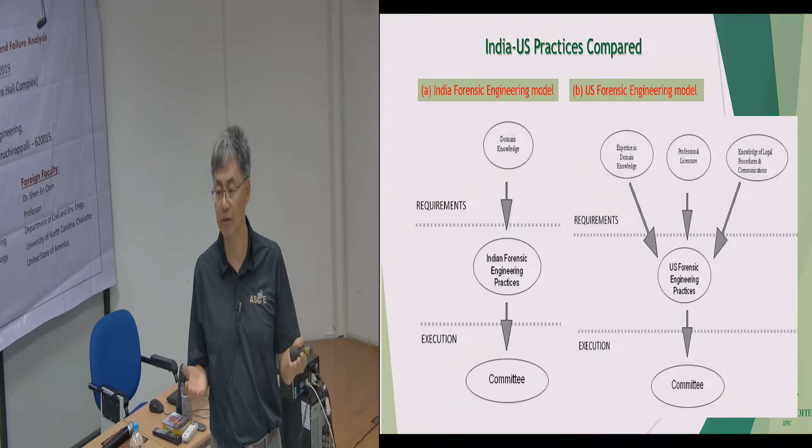After that trip, we published a paper in the Institute of Civil Engineering journal describing the difference between India and U.S. practice. It's really unfair to say that India doesn't know forensic engineering. The term just doesn't carry. You have a lot of failures, a lot of failure analysis, a lot of litigations, but to make it into an actual practice, many things need to be done.

Recognition of domain expertise is one area. There also needs to be a collection of literature. And more importantly, you have to disseminate knowledge—teach the class, let students learn. These are things we do a lot in America.

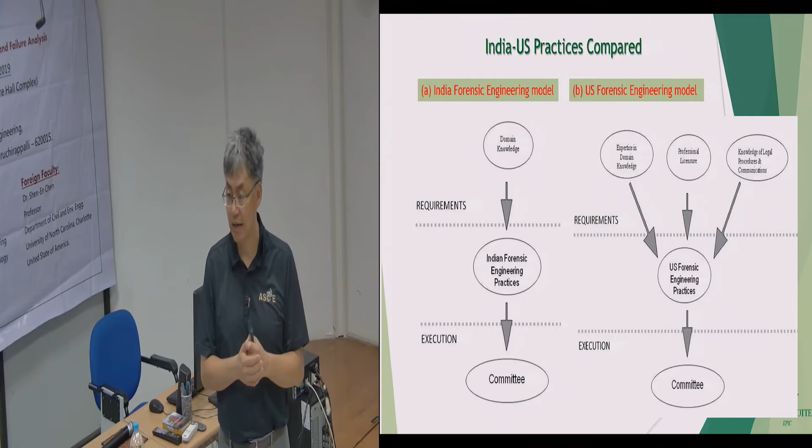Finally, there needs to be a committee that executes recognitions. I mentioned Professor Babu from IIS Bangalore—he's pushing really hard for a geotech division. I think there just needs to be equal structural efforts. And finally, there needs to be a national committee in India about forensic engineering.

Forensics is about logic. One of the lectures I'll be discussing is the inverse problem—what makes forensic engineering so challenging? One of the things you have to recognize is about logic. If A happens and then B happens and then C happens, does that mean A caused B, which caused C? Not necessarily. Some of the things I'll be discussing throughout these two weeks of class is logic.

One thing I don't like is that this is a very long lecture, so I suggest we make it more interactive. Anytime, stop me and ask questions. Many of you know me, and with such a small class, we need to be knowing each other intimately. We'll also be talking about failure definitions.

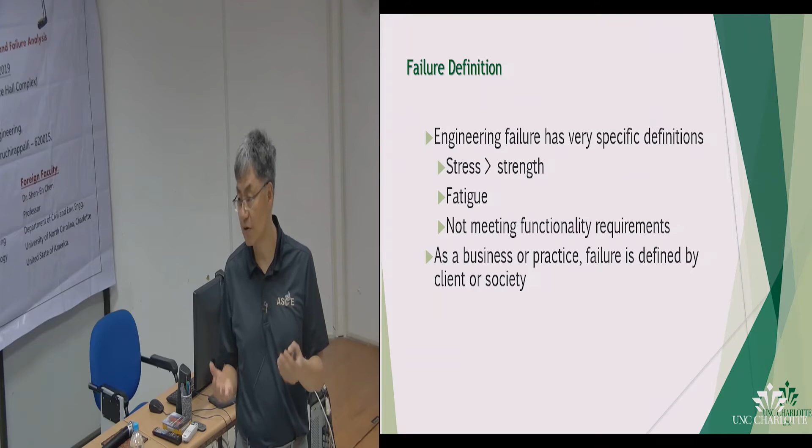The traditional definitions—stress, strength, fatigue—are all very important terms from a structural perspective, but we'll discuss how some of this carries no meaning, especially stress. I want to put Professor Karthik on the spot: how do you measure stress?

By area. Yeah, that's the definition of stress, but how do you measure stress in real life, from a structure point of view? You measure load and divide by area, right? You measure force. What do we use to measure force? Whatever is applied externally—the load cell.

What is a load cell made of? A load cell is actually made of a strain gauge. Through electronics, we measure the voltage change on the strain gauge, so in reality we're measuring deformation. What is a strain gauge? It's displacement versus change in length. So we never measure real stress.

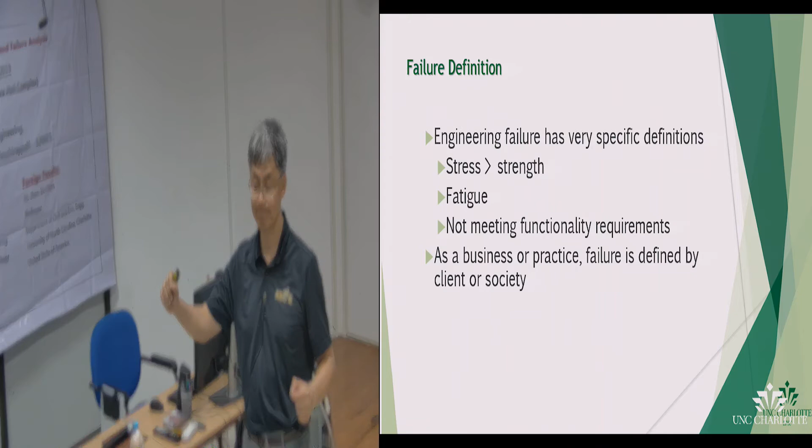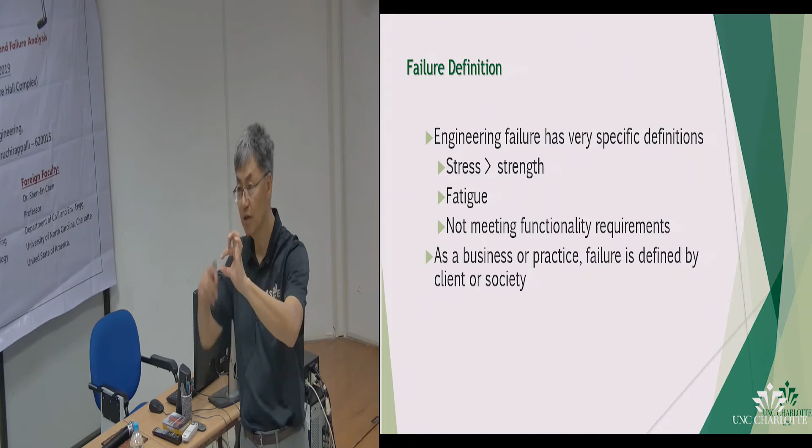Even deformation isn't exact, because a strain gauge is only so long. You put a strain gauge on a column and you're measuring deformation over that length only—the rest of the deformation is just assumed. We know the stress distribution is not uniform, so whatever we measure with a little strain gauge, we extrapolate our understanding of the deformation.

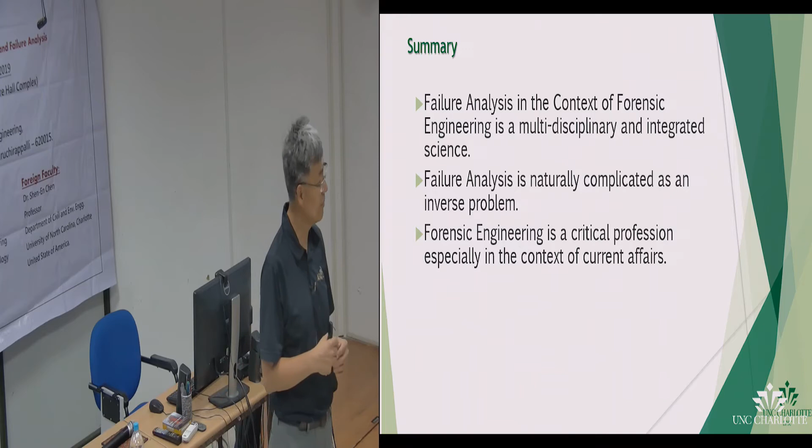So measurement science is something forensic engineers need to know very, very well. That's why when Navneet talks about the point cloud analysis, I hope he projects well enough about our limitations in understanding. In summary, in the context of forensic engineering, failure analysis is one of the core technologies you involve.

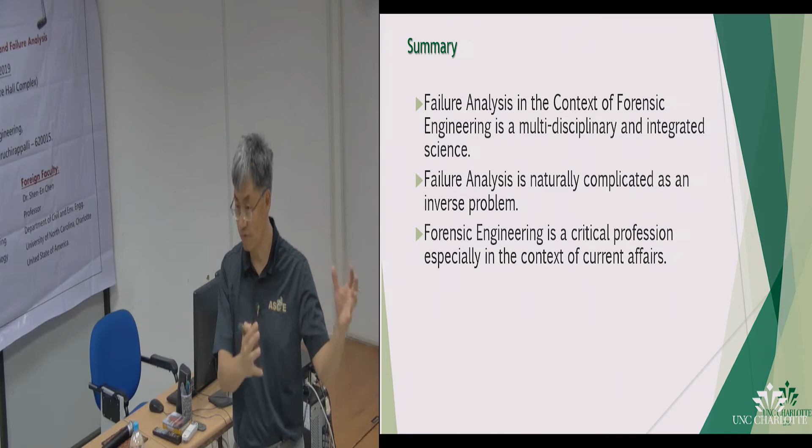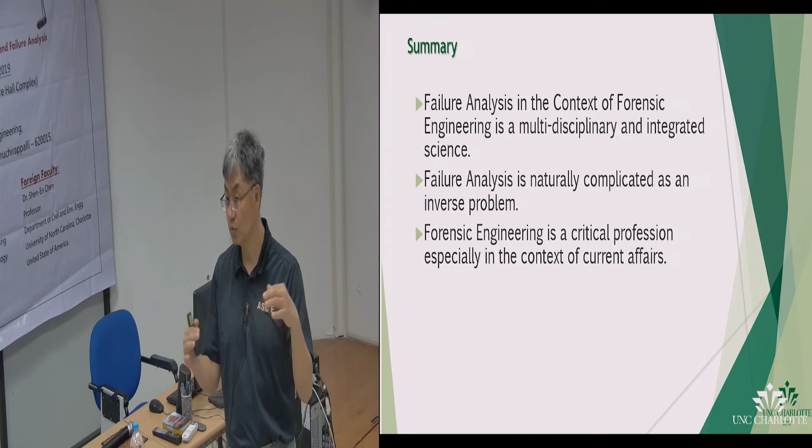But failure analysis is multi-disciplinary, and we will be talking a lot about those. It's not just about something quantifiable, but also something that is qualifiable. And then it's an inverse problem that we will discuss. I think those are the problems, the most critical core of this continuation class that started in 2007, that distinguish this series of lectures beyond any other school that teaches this, is that we actually look at this as an inverse problem and a logical problem, and that distinguishes us from all the other classes you would have taken as a PG student.

So a little bit about what is required. Because this is sponsored by a government grant, that's why we limit only a few students, because we wanted to get the most out of you, not me. I just talk. But we will have one class project, one homework, and then one final exam.

The class project, we actually wanted to make it like a real investigation. You will be given the assignment in class, and then we'll give you the syllabus agenda for this class. The day before the final, we'll have a final defense. You will be divided into groups, and you will do an investigation, and you have to defend your investigation among faculty. We will pretend we're lawyers, and we'll ask you stupid or intelligent questions, depending on the condition. And then the final exam will be an assessment on how much you learn in this class.

And trust me, it will not be easy, even though it will be only multiple choice problems. I think that's the last one. Any questions about this? I think it's lunchtime.